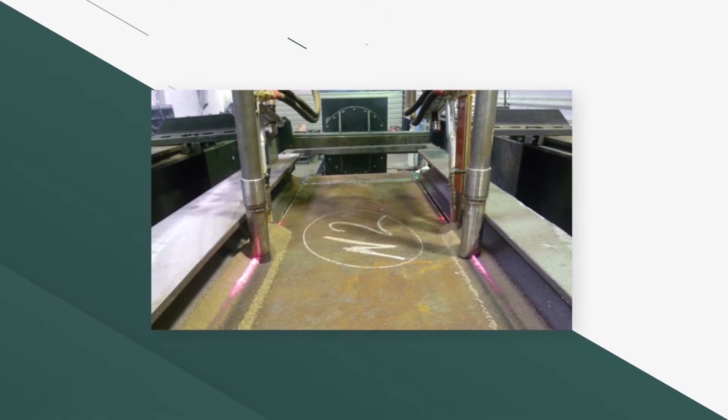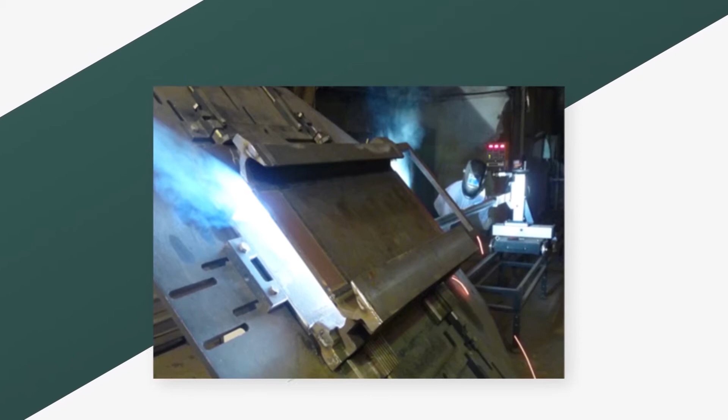This reduced the number of defects by 250 to 300% compared to carbon dioxide welding. Internal seams on the lower bottom are made for the entire length of the pan.

Preheating of the welded surfaces, heat treatment of parts and assemblies to improve their mechanical properties, and complex chemical heat treatment of gearing parts are performed. Large-sized parts and housings are machined at the portal center with straight and angular milling heads without parts relocation. Mechanical machining of lock joints of the pan in a welded pan is done at the Craftsman Portal Machining Center.

A circular grinding machine allows grinding of shafts up to 3 meters long. The Puma long shaft processing machine also allows handling of shafts up to 3 meters long.

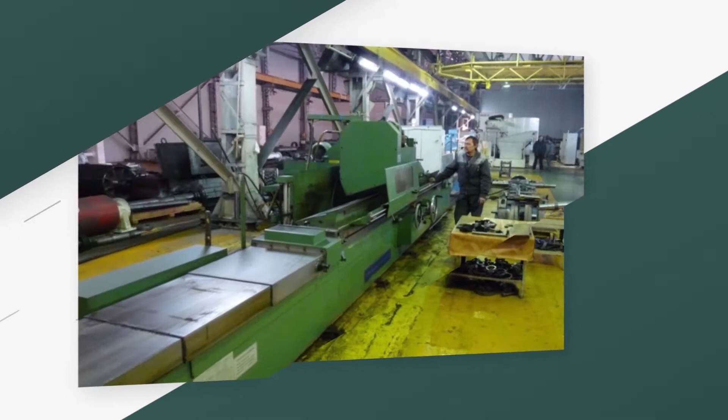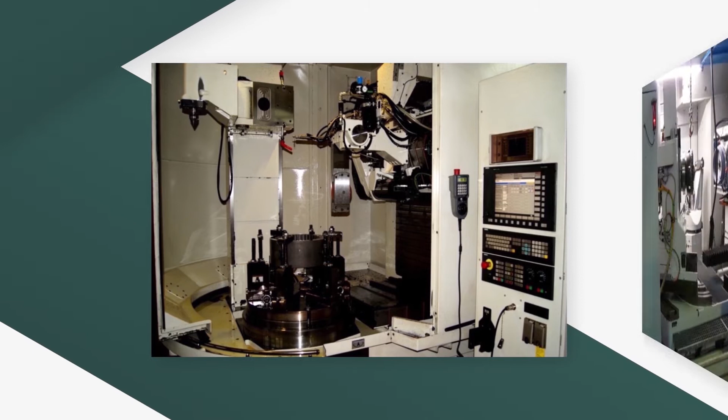Tooth surface finish is achieved by grinding gear teeth of all geared transmissions, including all bevel gears with a circular arc tooth and internal gears, providing the 7th accuracy grade of gears, noise reduction, and increasing the service life of gear cases. All gear cases are machined on multifunctional machining centers to achieve high-precision mating gears.

100% quality control of parts is performed, including ultrasonic quality control of the weld with a digital flaw detector in the amount of 100%.

Angeromash product line: Angera armored face conveyors.

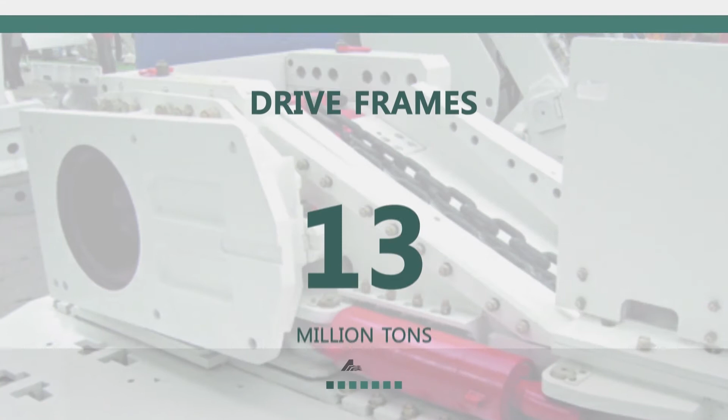Service life levels: drive frame up to 13 million tons, drive sprocket up to 5 million tons, replacement parts up to 3.5 million tons, and pans 7 to 15 million tons depending on mining geological conditions.

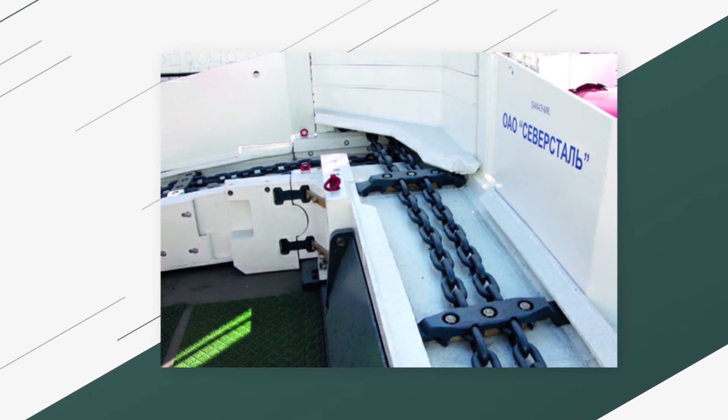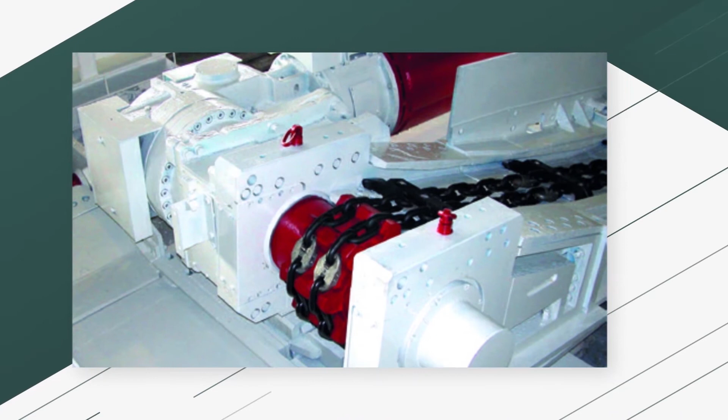Flights last up to 3.5 million tons. Types of discharge drive include straight, side, and cross frame. There is a return drive of a lower design for handling of rock mass by cutter loader, with the ability to install drive units of total power from 250 to 2000 kilowatts.

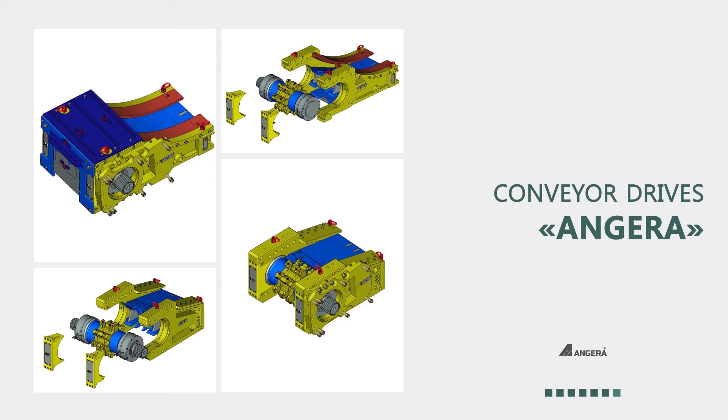A system of centralized lubrication serves the sprocket shaft bearings. The drive sprocket has a wear-resistant layer of 10 to 12 millimeters and a modified bed shape for dragging contact with the chain link. It is possible to dismantle the drive sprocket shaft without removing the gearbox, and replaceable parts are installed in the intensive wear areas.

Upgraded drives of the Angera conveyor: the return and discharge drives were decreased by 17% and 18% respectively, using as an example the drive for chain 34 by 126 with power of 2 by 400 kilowatts.

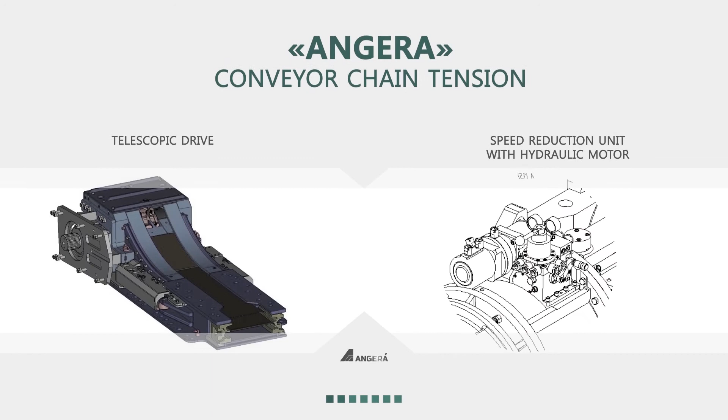The Angera conveyor chain tension system is equipped with a telescopic return drive for AFC chain tension, with extension of 300 to 500 millimeters depending on chain gauge. The macro tension control system automatically maintains tension when the longwall hypsometry changes within given parameters, and allows prompt chain shortening.

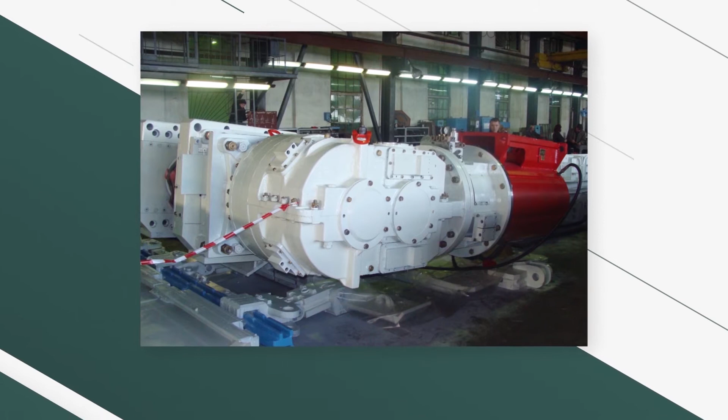Angera conveyors are equipped with 3 types of gearboxes: 250, 400, and 630 kilowatt, available in 2 versions: longitudinal and transverse. Forced lubrication is applied to the high-speed gearing pass, which also serves a plunger pump, increasing the life of the bearings and gearing of the tapered pass.

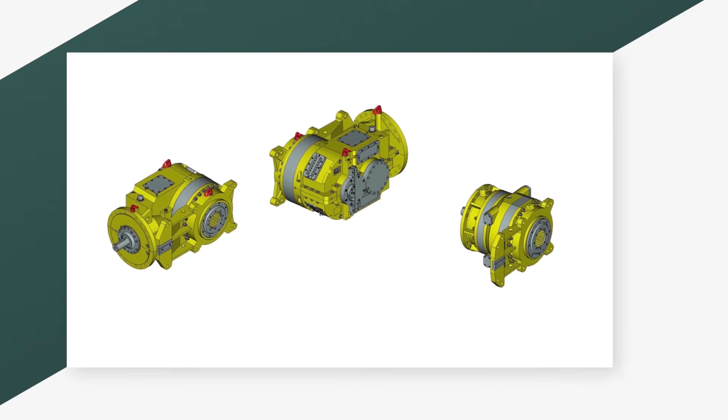In the design of gearboxes, we use bearings and sealings from the world's leading manufacturers, with connecting dimensions corresponding to European standards. Application on steeply dipping seams and during continuous running in low-speed mode with 2-speed electric motors and variable frequency drives is also possible. These features are indicated for the modern shape of the pan side face profile.

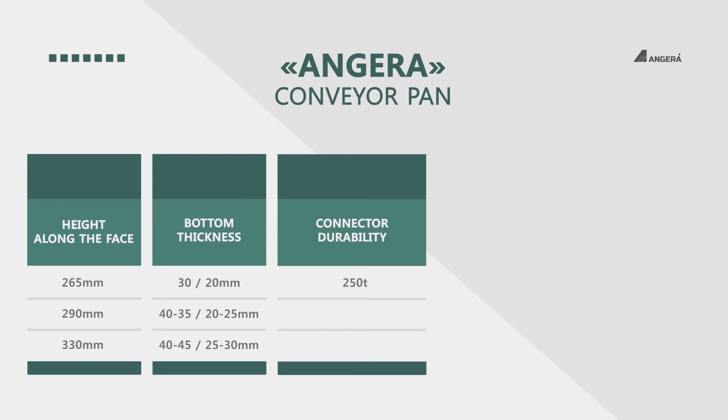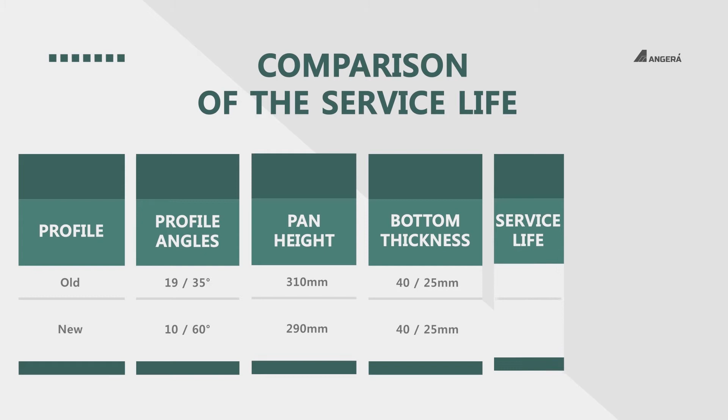In comparison of the rolling side face variant with the old profile shape and the molded side face variant of the modern pan profile, the contact surface of the side face and the AFC was increased by 50%. Performance indicators of the modern shape of the side face profile of the pan.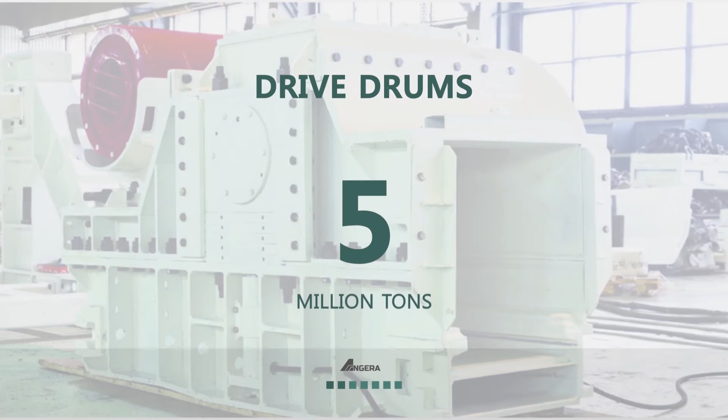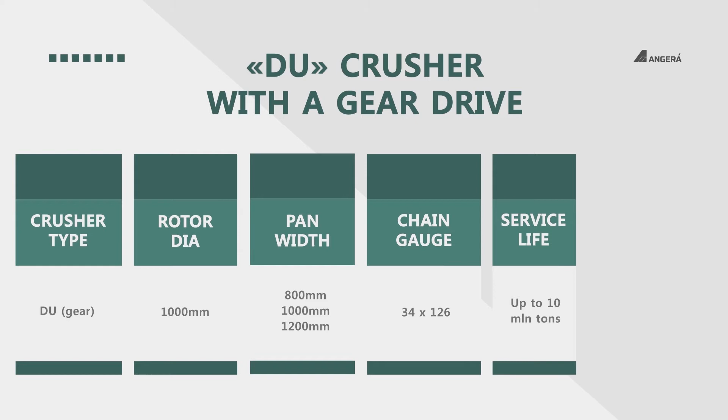Coal crushers Series DU. Service life pans 5 to 10 million tons depending on the flight profile. Drive frames up to 10 million tons. Drive drums up to 5 million tons. Replaceable parts up to 1.5 million tons. Two versions, with gear drive and belt drive. Crusher with a gear drive. Crusher with a belt drive with a rotor with a diameter of 800 and 1000 millimeters.

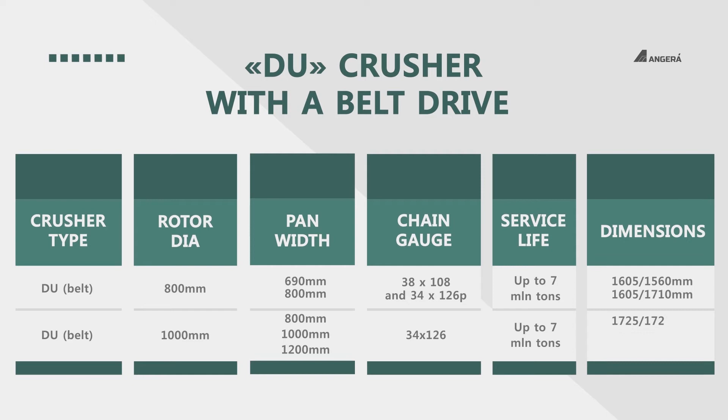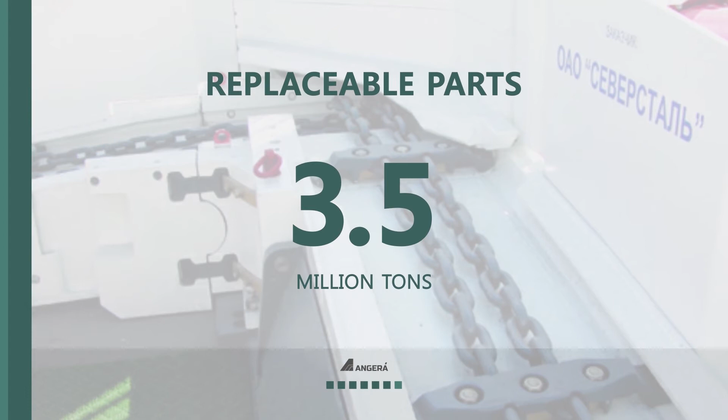Scraper stage loaders PSP series. Service life pan 5 to 10 million tons. Flights 2 to 3.5 million tons. Drive frames up to 10 million tons. Drive sprockets up to 5 million tons. Replaceable parts up to 3.5 million tons. Pan line is similar to Angera conveyor.

The system of chain tensioning of the PSP stage loader is equipped with telescopic discharge drive for the AFC chain tensioning with an extension of 350 mm. It has the functions of automatic maintenance of tension and mechanical fixation of the telescopic pan extension, as well as rapid shortening of the chain with a reduced speed unit.

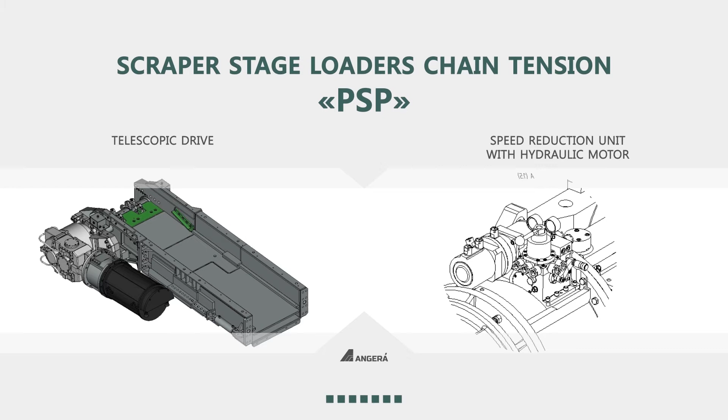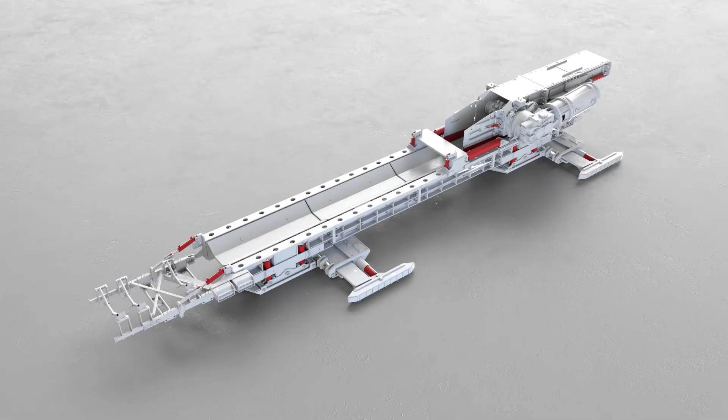The processes of the stage loader operation PSP series with a loading station. Providing lateral or vertical thrust. Combined thrust is possible. Formation of reloading from PSP to belt conveyor.

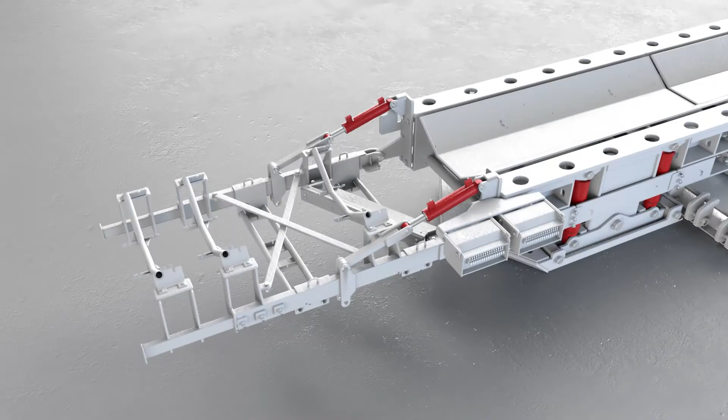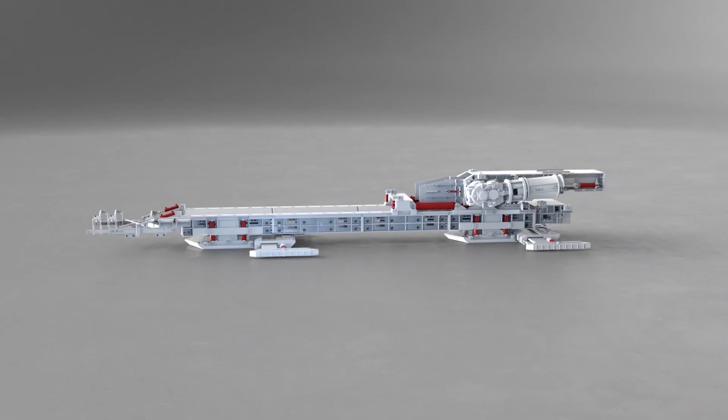Adjustment of the loader in 3 directions. Aligning of tables for a uniform belt movement.

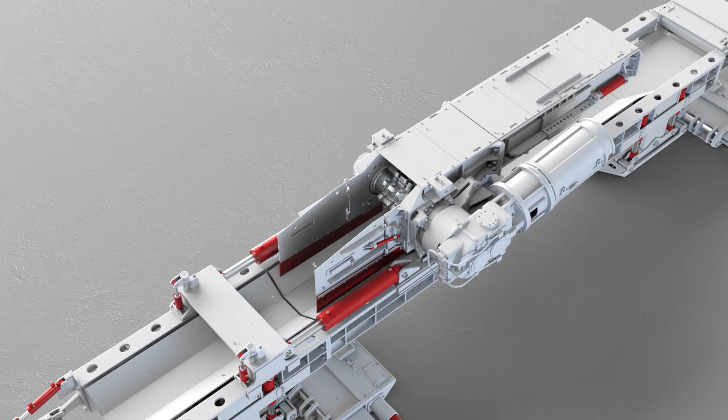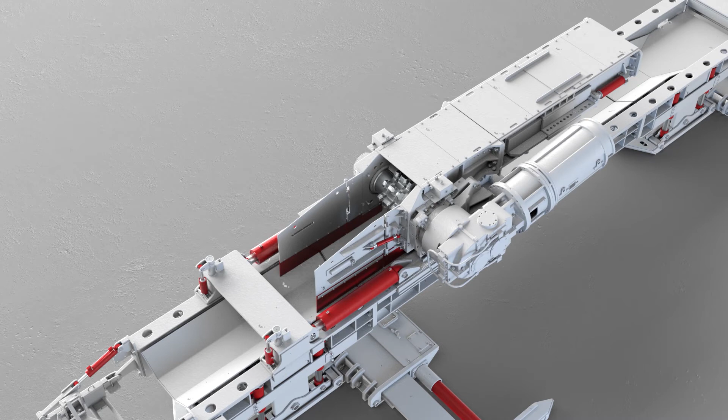Advancing of stage loader, advancing force 200 tons. Replaceable troughs under the operating belt.

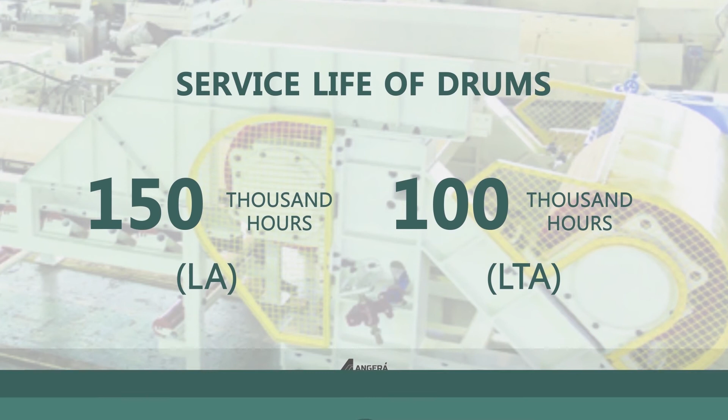LA and LTA belt conveyors. Service life of drums 150,000 hours, type LA. 100,000 hours, type LTA. Service life of the lining is up to 20,000 hours. LTA belt conveyor parameters. LA belt conveyor parameters.

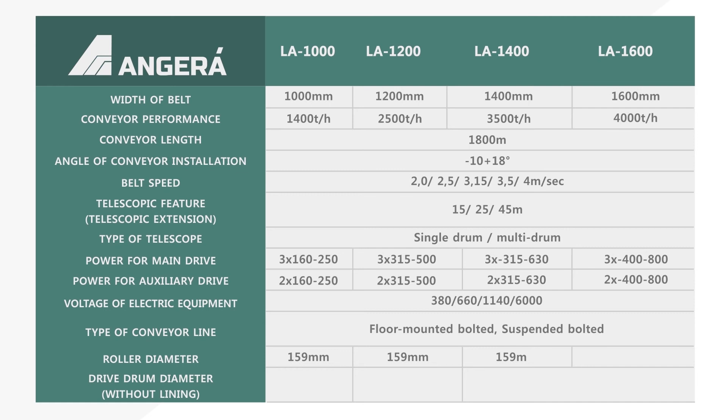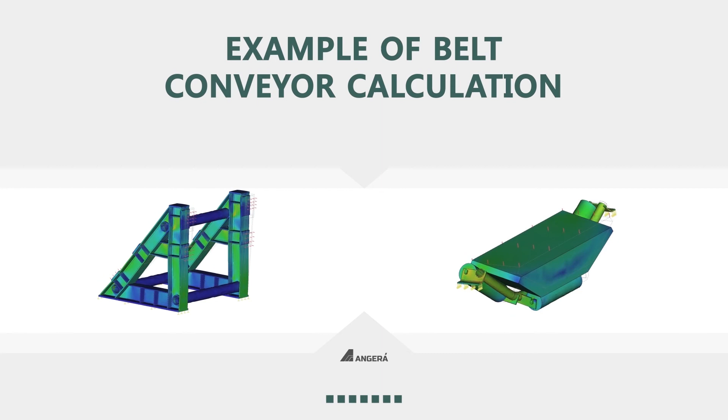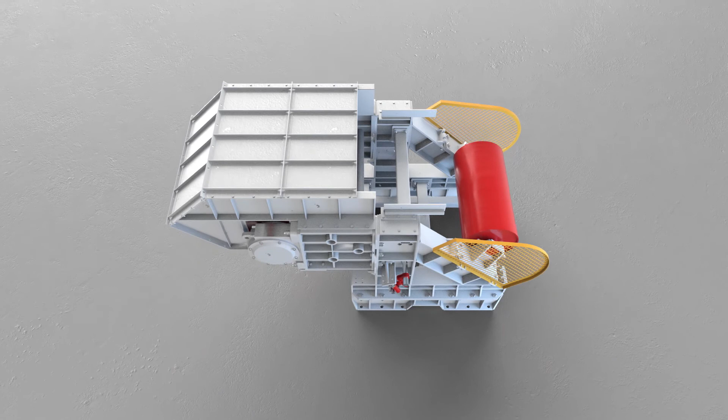The structures of conveyor parts and assemblies are subjected to complex testing using the finite element method of strength calculation. Design optimization for better durability and service life. LA type conveyor. It is equipped with a drive drum with a lining coating, interchangeable rubber plates or metal ceramic, provides high unification, mobility and identity across installation points for subframes. The power frame of the non-separable design is designed to reduce installation time.

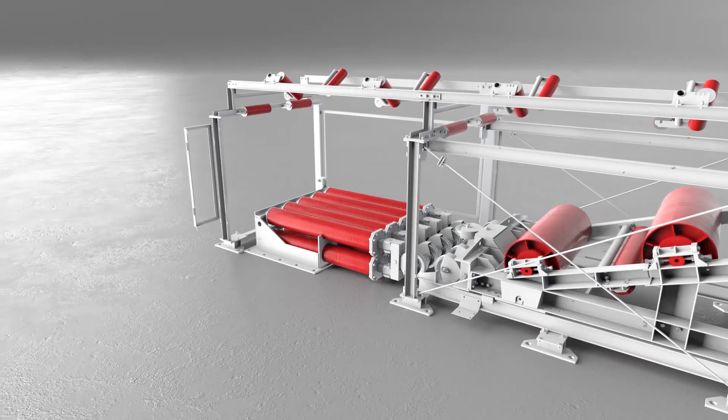LTA belt conveyor drive. It is equipped with a drive drum of modular design with a tip-top ceramic sliding coating. The power frame of a split-body design is created for convenience of delivery. Cassette tensioner for LTA, equipped with a dynamic load compensation device, provides the maximum capacity with the minimum length and automatic control of belt tensioning. The LA drive sections also have the possibility of modular construction and unification of the main components.

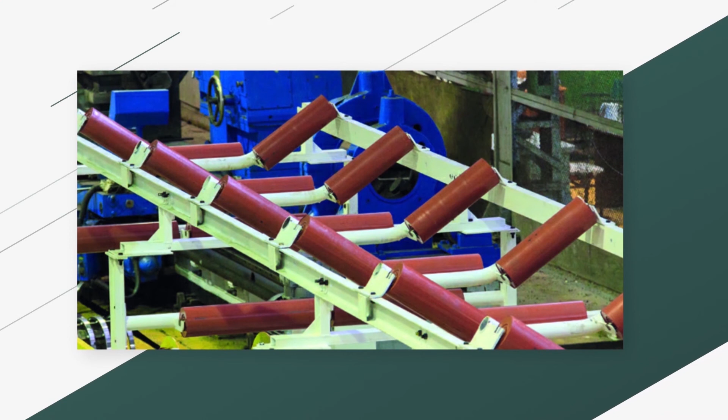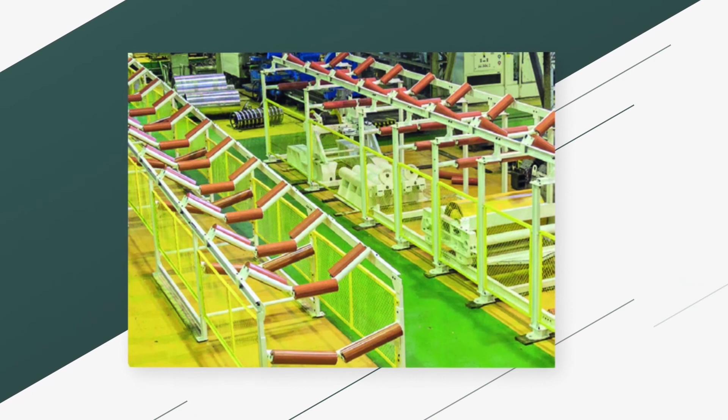Belt conveyor structures. The design of all conveyor structures is based on two basic principles. The edge of the roller bracket is below the tube generating line. That completely eliminates the longitudinal rupture of belt canvas. The mutual arrangement of working rollers and runs. The center of the structure gravity is below the level of the run, ensures stability and rigidity of the conveyor structure. Two types of conveyor structure are supplied.

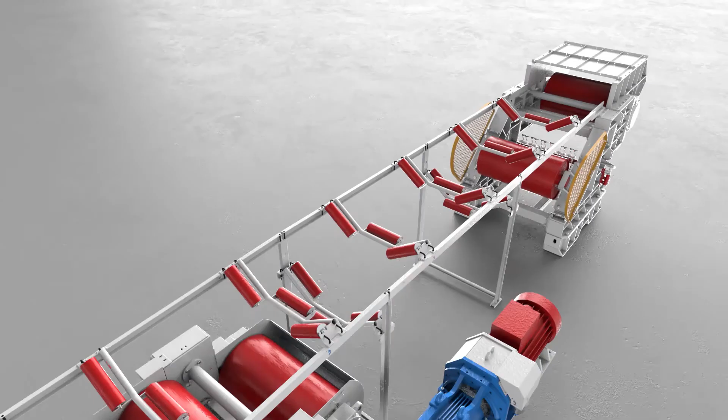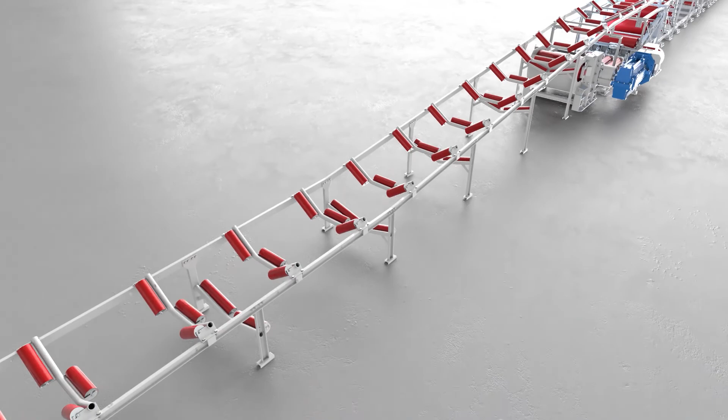Rigid floor-mounted bolted conveyor structure. Bolting of the runs to the racks is relieved from the weight of the belt and the rock mass. The roller support of the return belt has a rigid welded construction.

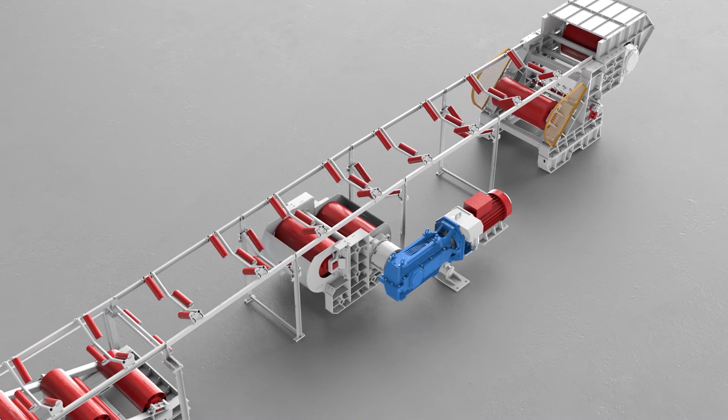Rigid, floor-mounted, bolt-free. Quick disconnect. Roller supports and rollers of the carrying belt and return belt are unified. Minimum labor intensity of mounting and dismounting of the structure. The complete absence of bolted and other type fasteners. The conveyor structures are unified. These structures are completed for both LA and LTA series conveyors.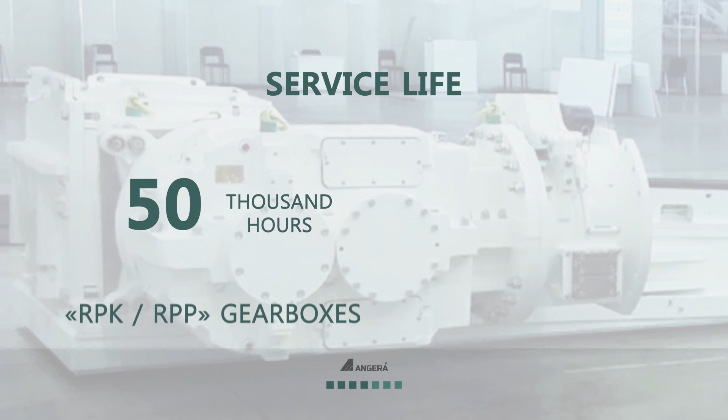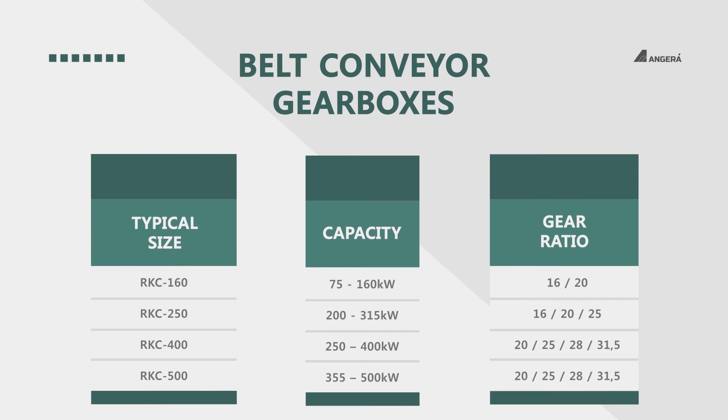Gearboxes RPK, RPP, and RKC. Service life RPK, RPP gearboxes 50,000 hours. RKC gearboxes 70,000 hours. Belt conveyor gearboxes. AFC gearboxes.

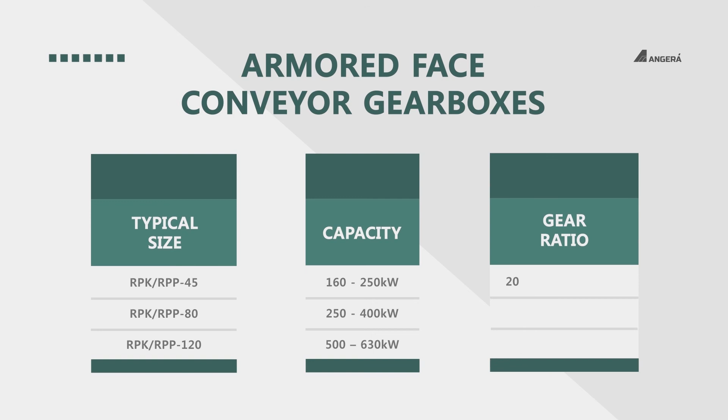Anžeromaš is one of the largest suppliers of mining equipment in Russia. Long-term and fruitful cooperation with Russian and European partners allows the company to use the most modern technologies in creating its products. Full production cycle, quality control, and time-tested products. Angerá is reliability in everything.